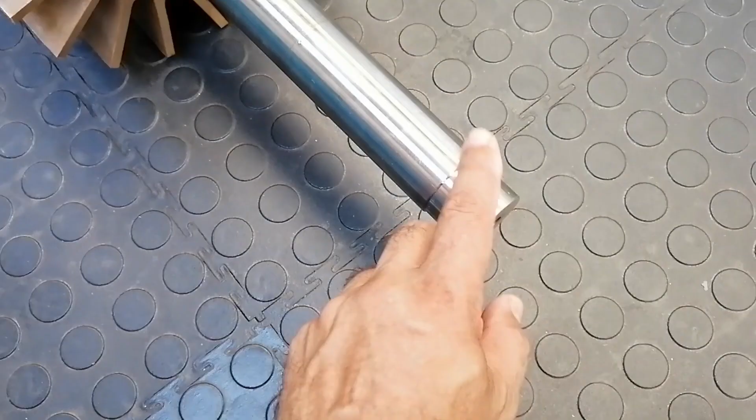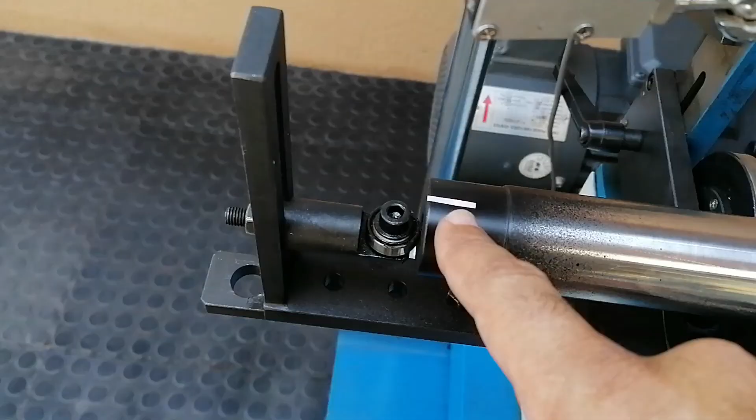Enjoy this video, guys. And I'll spray this area here. Okay, so that's all sprayed up now. You can see the lasers on the reflective tape.

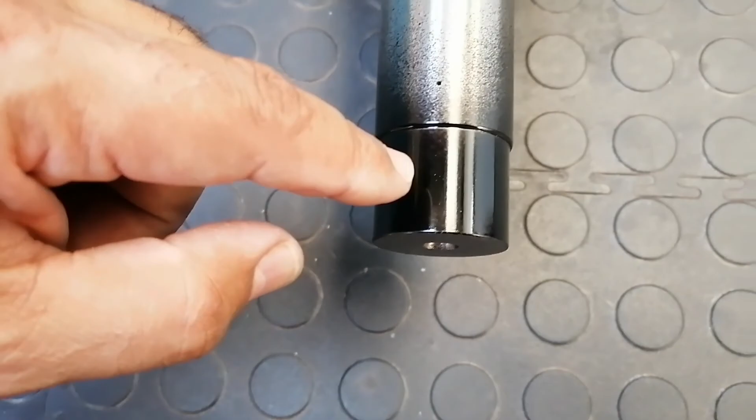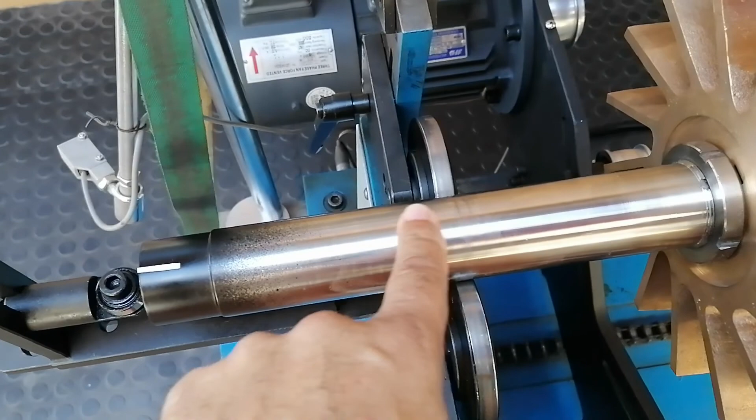So the reason for me spraying that black is because the shaft gives off a reflection. The laser from the speed sensor might get a false reading with that reflection, so I give it a nice black background. So I must just put another piece of sticky tape in front there. But this gets put on every shaft just to eliminate that potential false reading.

You can see the lasers on the reflective tape there. I don't know if you can see the red dot, but anyway, so this is the speed sensor, and that's 0 on the shaft.

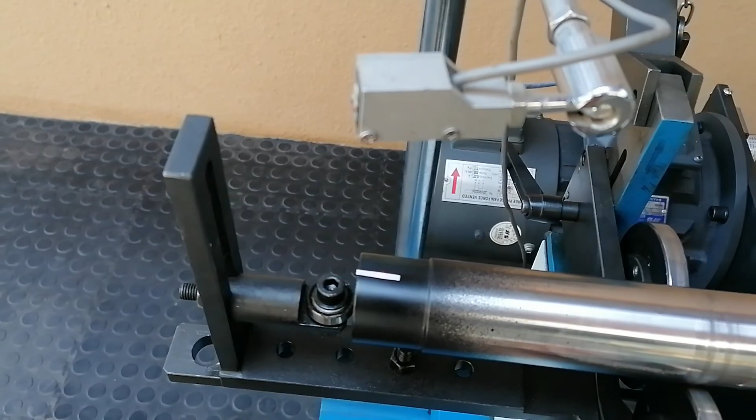In the keyway you put some putty. It's not the exact same density as the steel, but it's quite close, so we put that in there just to take up the steel that's machined out. So yeah, almost ready to go.

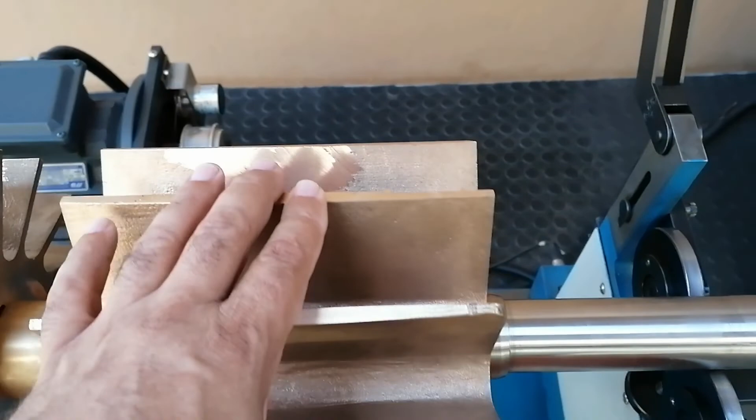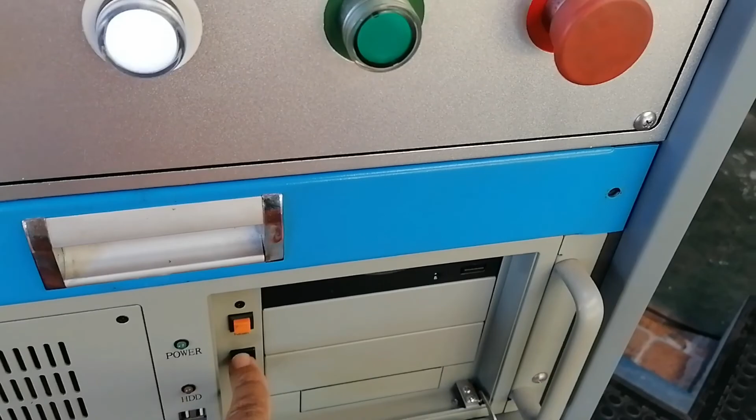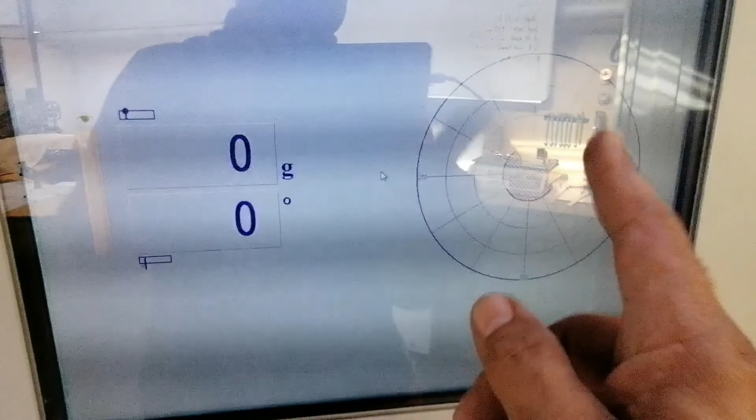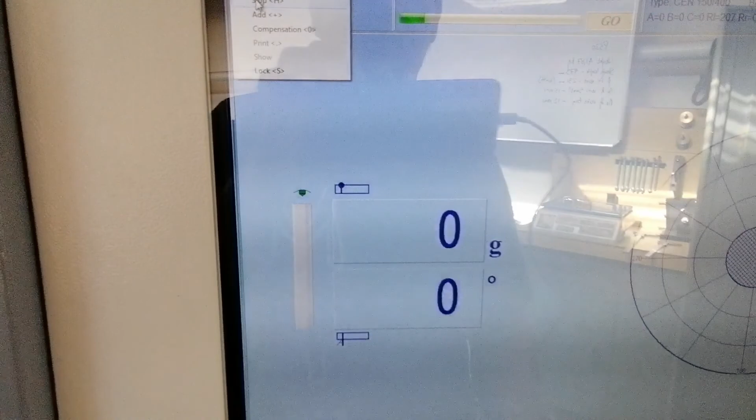Alright, so the computer's on. If you can recall, this was a screen that I balanced the first impeller with, because that's a single plane, because there's only one impeller. So this is the thing that shows like one impeller. So once again you go up there, you stop that, you go to rotor, and you add another line.

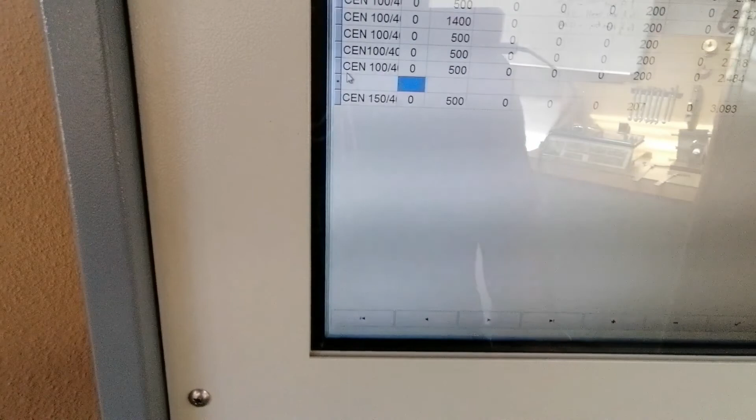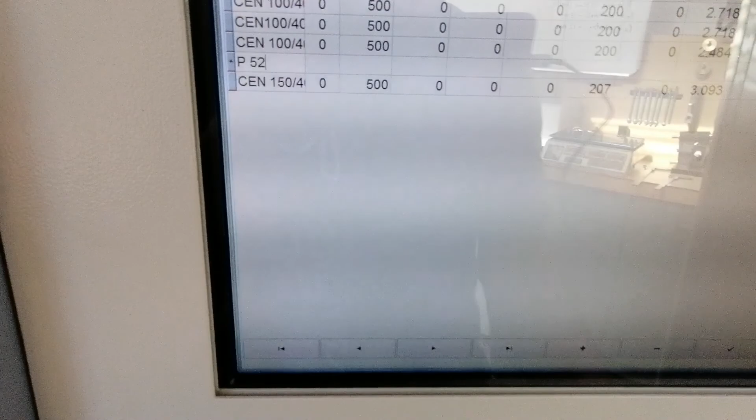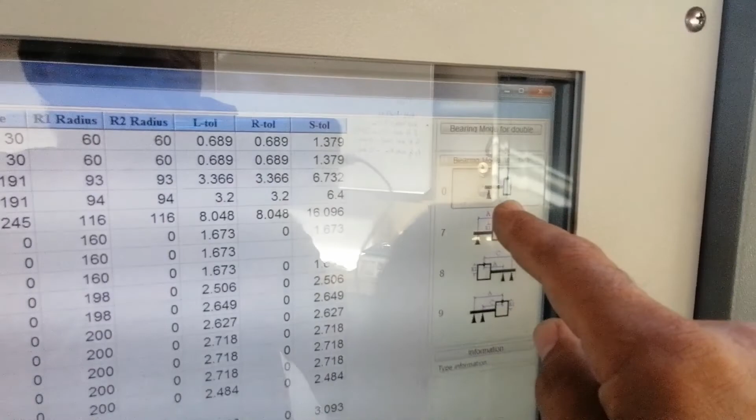So in there you put the type of impeller. In this case it's a P520. When you come to this one here, you see there's a 0. With the previous one that you saw in the other video, there was 0, because that showed 0 there, as you can see, which is a single plane. This is a double plane. Okay, so you change that mode.

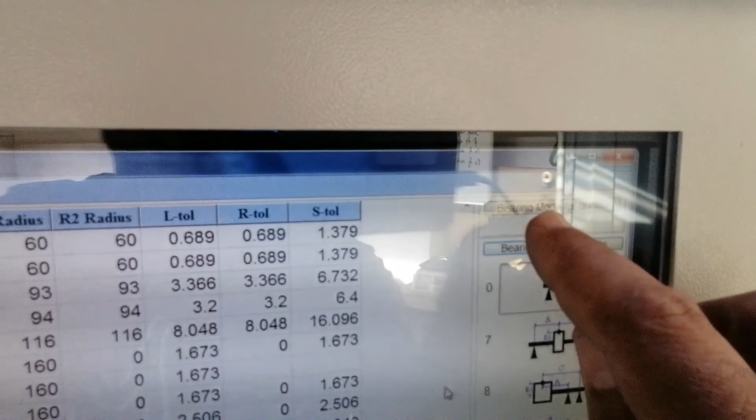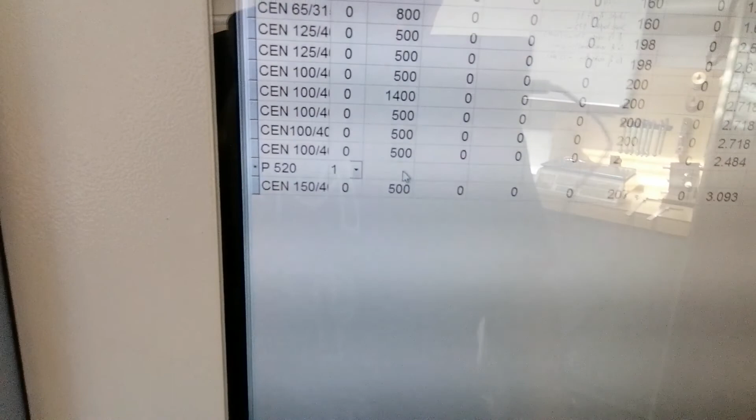I don't know if you can see, there's a bit of a reflection. See, there's single mode there and there's double mode there. So you change that there, and you can see there number 1. That's basically the configuration that we have here. So you go back to this side here and you press 1. So it will choose number 1 over there, and then you start filling in this information.

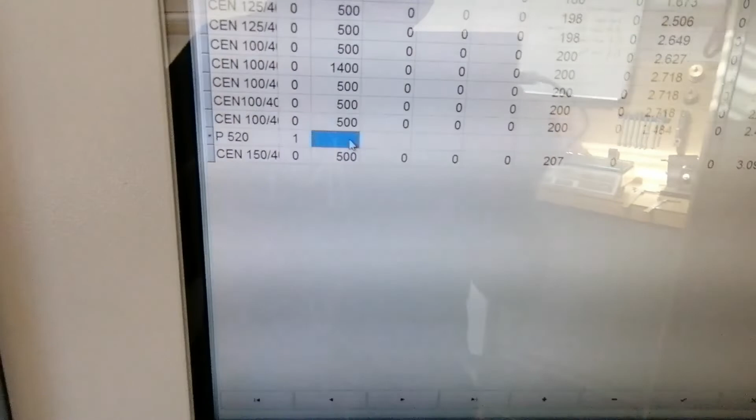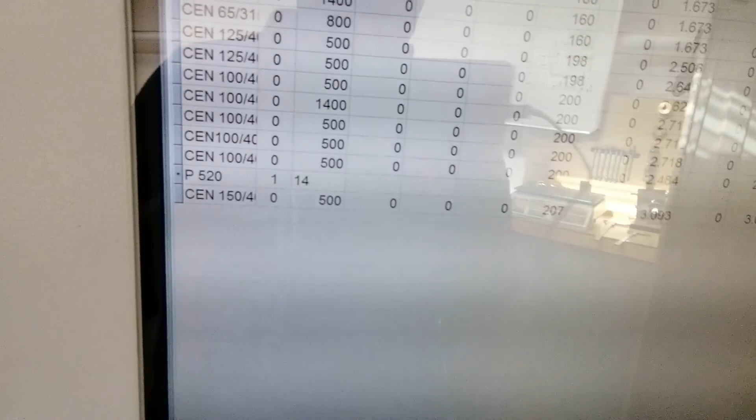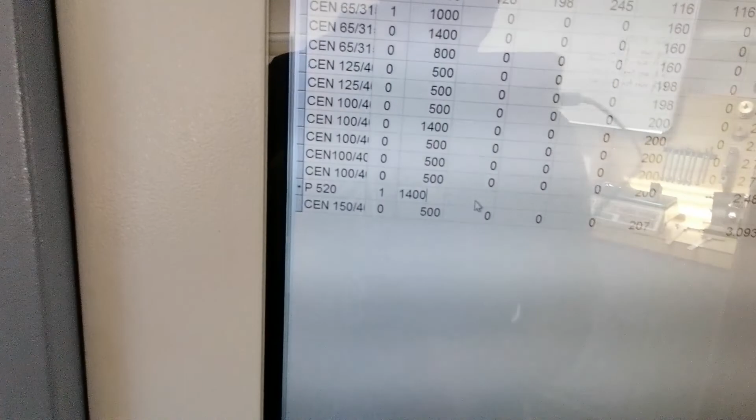Alright, so the first thing you do here is you put in the speed that it operates at in the field. So I'll make it 1400. A size, you see all the others there were zeros because this is all single plane, this is all double plane here. So now you start taking sizes on the equipment over there. I'll put it in time lapse, and I'll take all these measurements. Okay, I'll just do this quickly here.

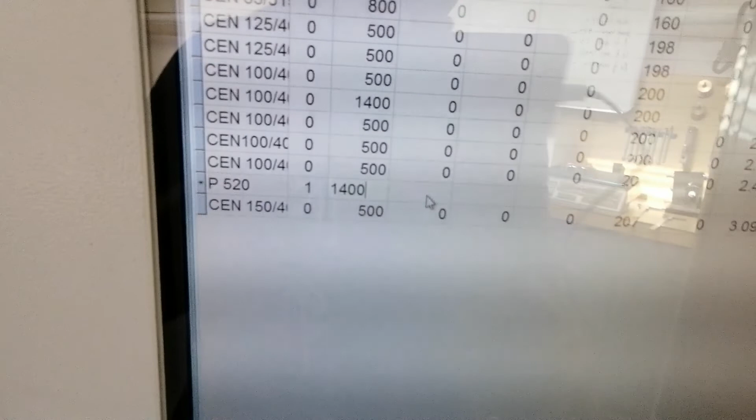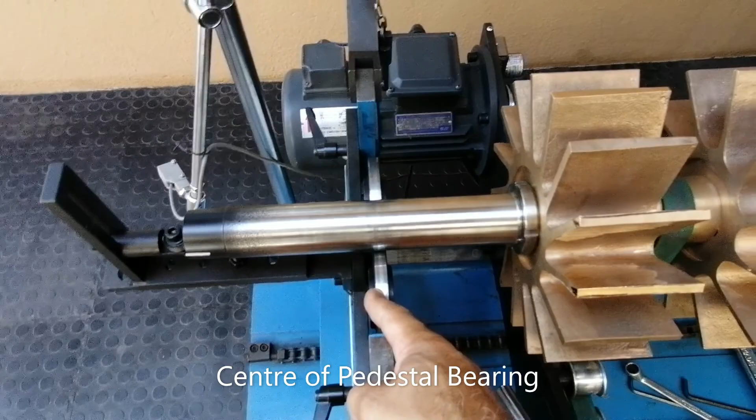Let me show you. Like A measurement will be from the center of this impeller to the bearing on the pedestal. That would be A. C will be from the center of this one to the center of that roller there. And B will be from the center of this one to that one. So you can see here they ask for A, and they ask for B, and they ask for C. And that's just what I showed you there now.

Then R1 would be the height from here down to the shaft. And then you take the diameter of the shaft and you divide that by 2 to get the radius, and you add the radius to this height here. So you can work in the center of the shaft. That will give you the measurement from the center of the shaft to there. That would be A.

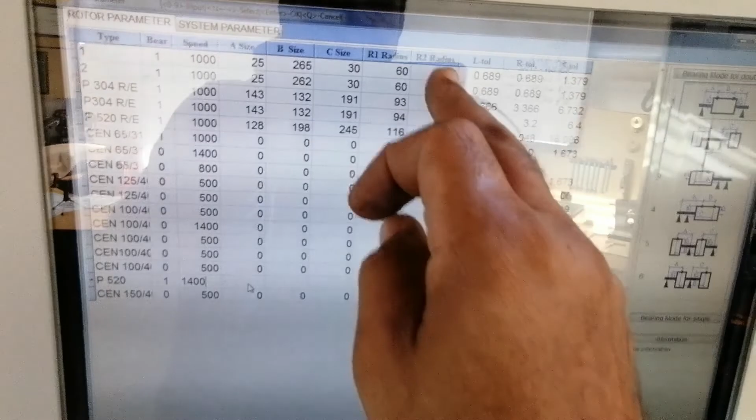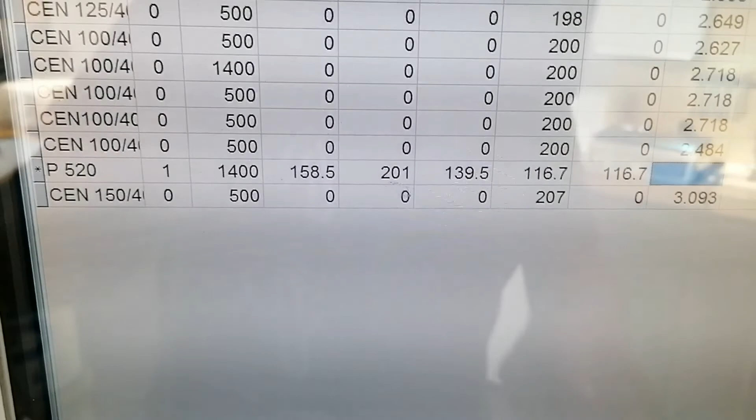That would be radius 1. Radius 2 would be this side here, which would be the same as R1. So let me just capture that data. Okay, so I got all those measurements from the impeller like I explained to you earlier.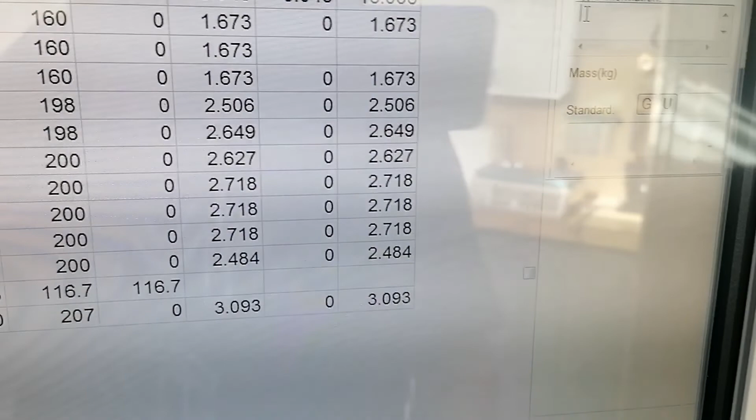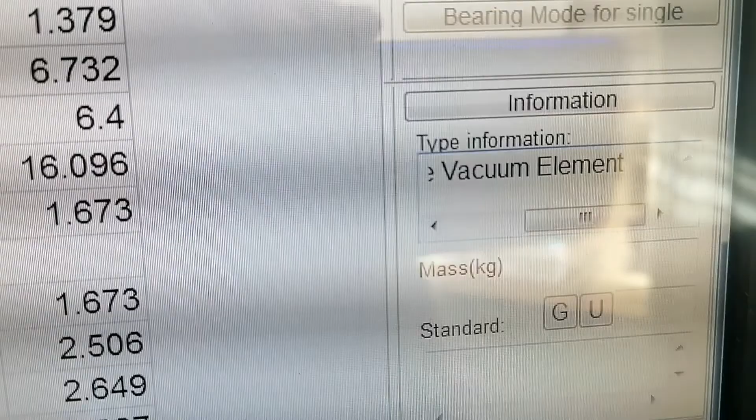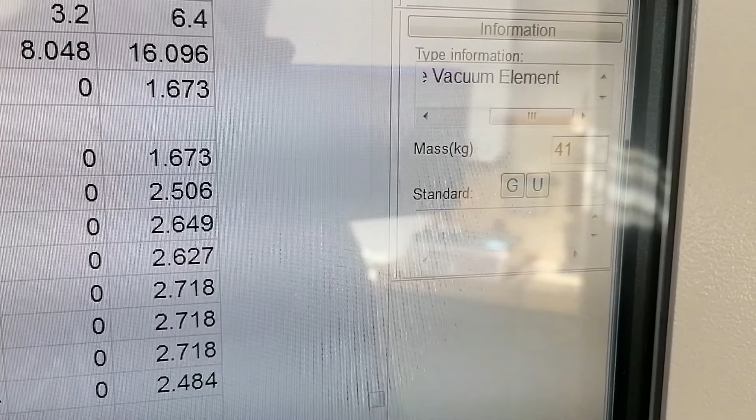Fold it in. Got to this stage, so once again I go here to the information side here. Press that. And then I put in the impeller size, the impeller make, which would be P520, bronze. Right, so I punched in the bronze vacuum element. The mass of this thing was 41.87. 41.87. So you'll get your tolerances here.

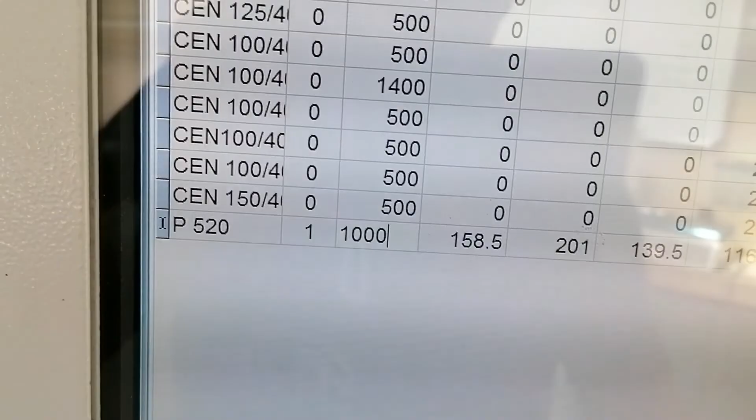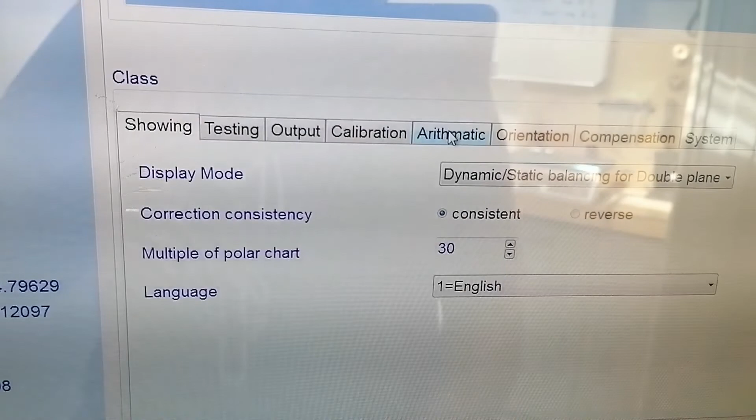Then you change your speed again here to what you're going to balance at. This one I'm going to balance at 1000. And then I'll press OK. Then I'll go to the systems here. I'll change this here to double balance, dynamic double balance. No, static, that one there. And then I'll go to the arithmetic. 8.9, that is the density. That stays the same. All of this stays the same here.

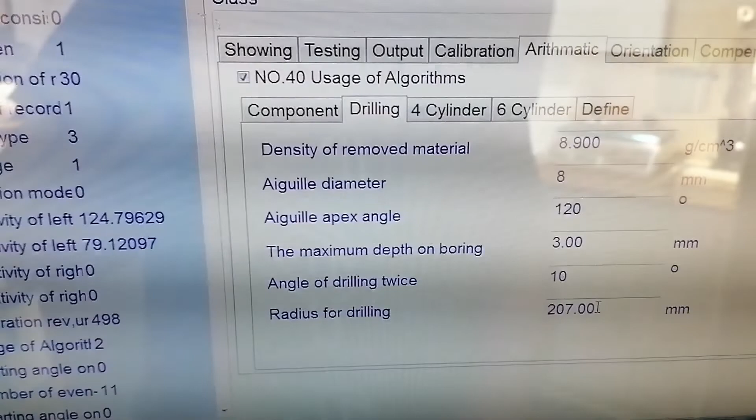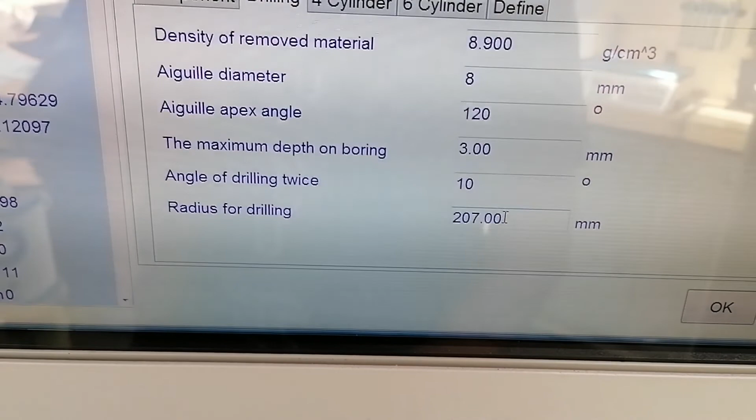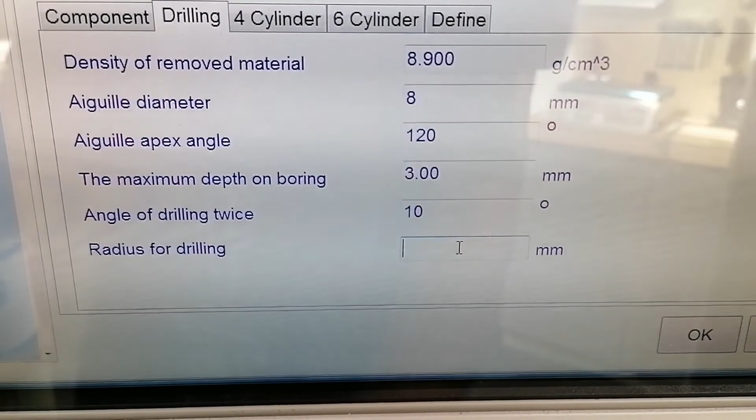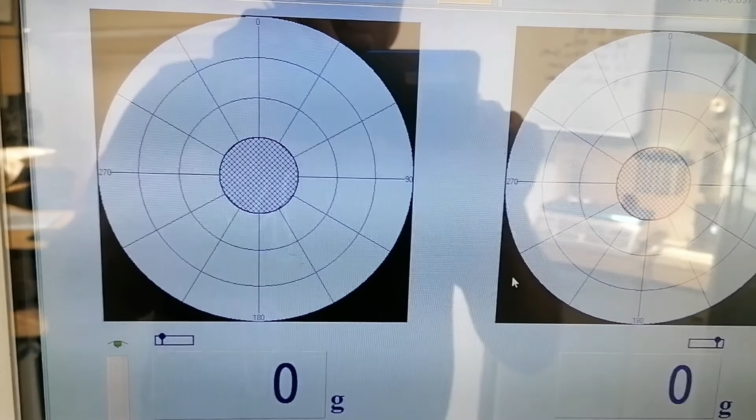This changes here because the radius of this. Let me just check what this radius was. Yeah, so then here you put the radius in. The diameter was 231. So this radius here will be, let me just check, 115.5. And then you OK that. So there you can see you have double screens now, but as soon as I run the machine, this will change. So yeah, let's just start the machine up.

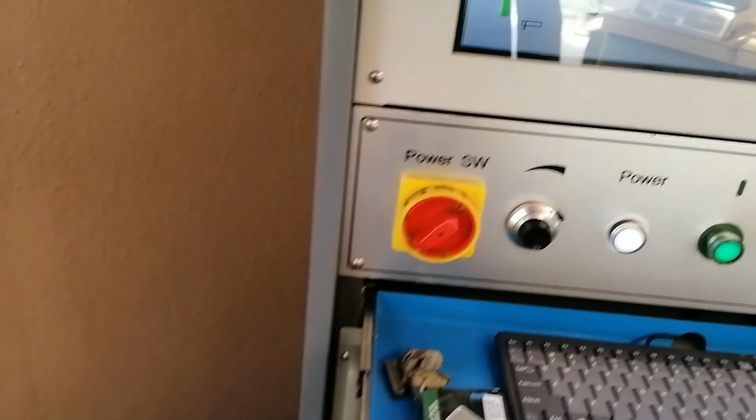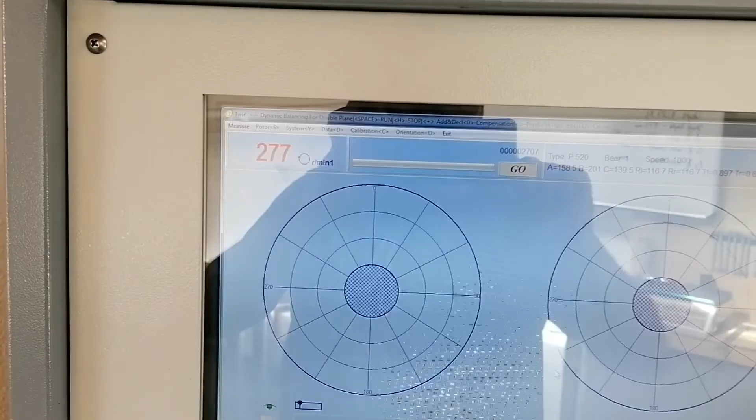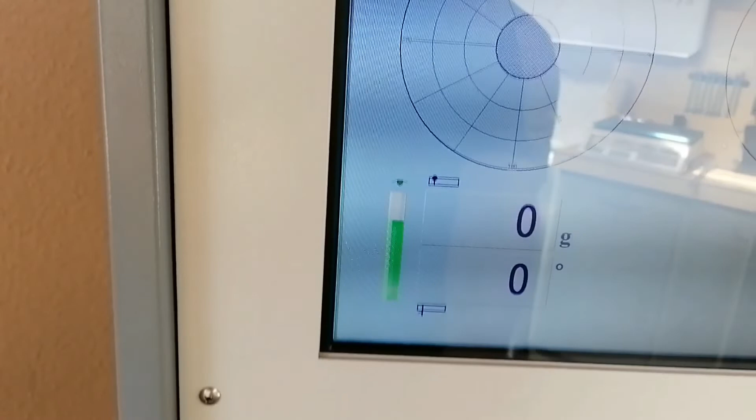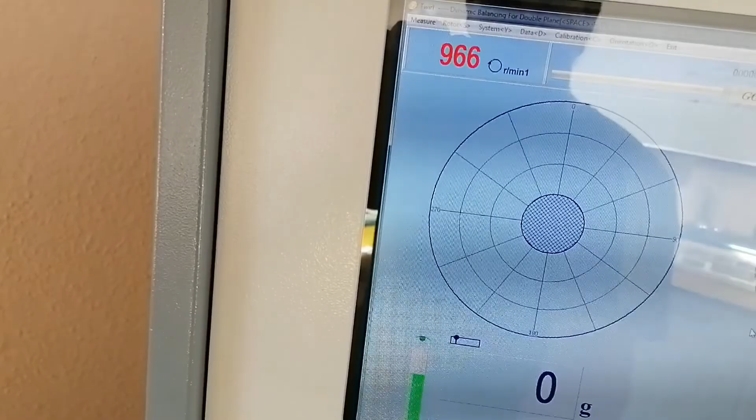So there you can see, guys, the screen changed to that one, and she's busy running now. Obviously it will go up to 1000 here. Okay, she's on 640 now. I'll just turn it here. You see it's climbing up. She's picking up speed over here. Turn it some more. Okay, so she's almost at speed. You can see she's really motoring on the machine. Turn it here some more. She goes.

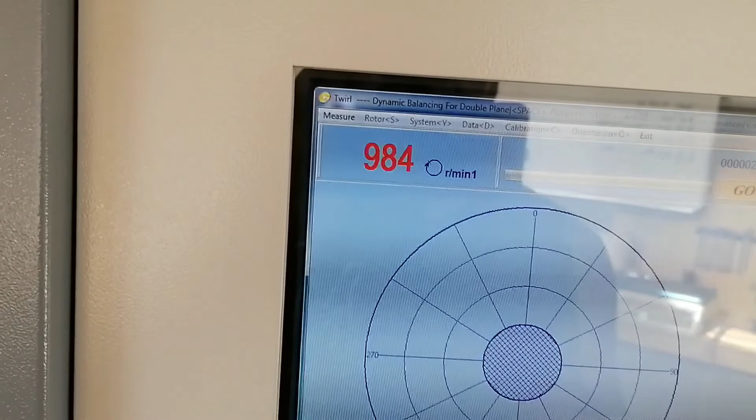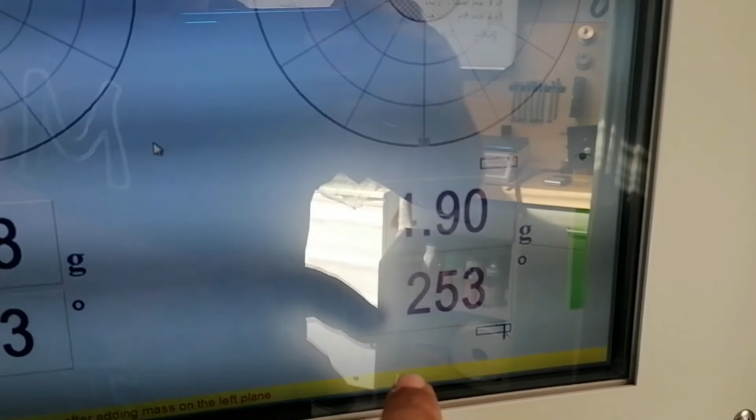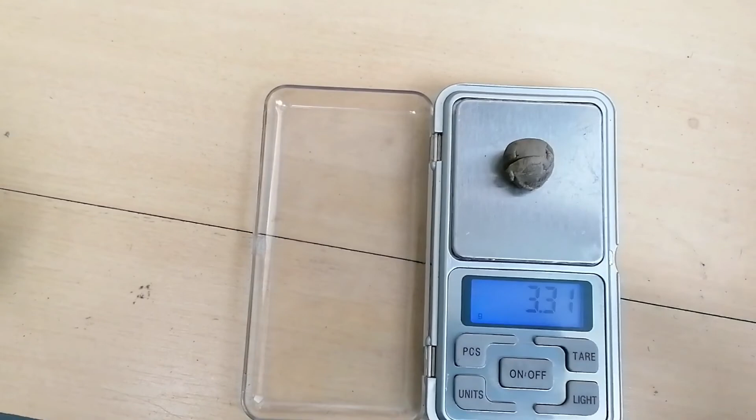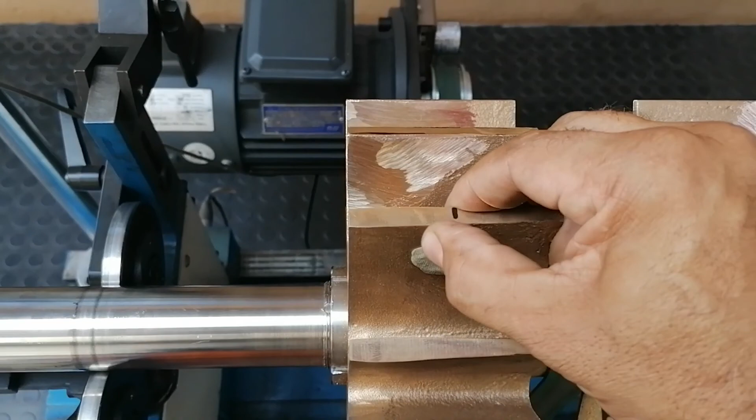Okay, there we go. So once she's up to speed and I stopped it, she says 4.38 at 303, 4.90 at 253. So now I'm going to put on the calibration putty. Okay, so I got my scale, took my piece of calibration putty, put it on there, and that's 3.31. Let me just write that on the board. And that I put on at 0. So I'll come here. She's at 0 there. Put the putty on. Make sure it's nice and firm, otherwise it will just fling off when you work the machine.

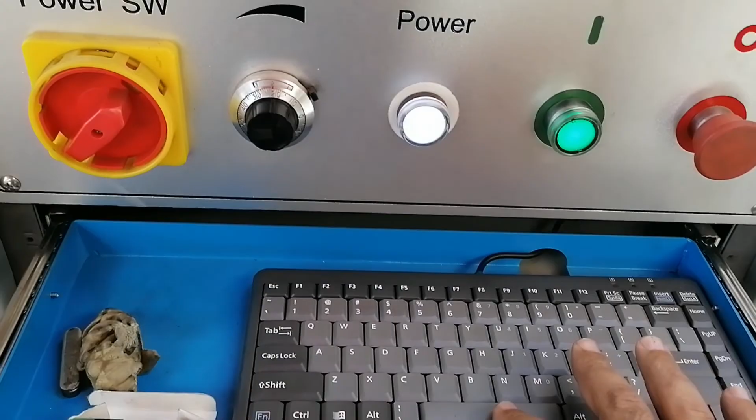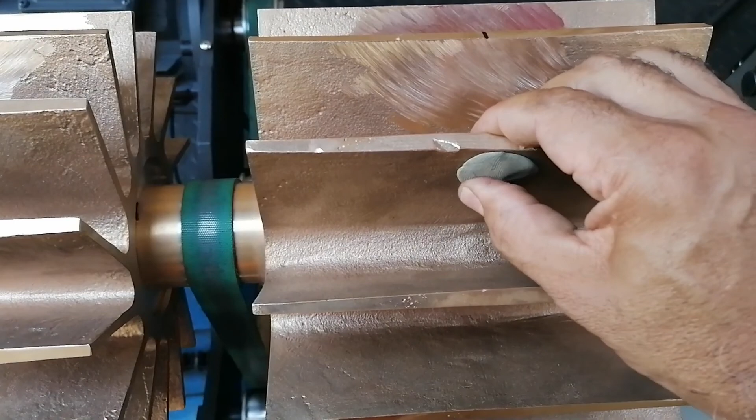So now start it again. Should go up to 1,000 again. Okay, so once it's full green, I'll press H here and I'll stop it. And then the moment she stops, I'll take the putty off this side and I'll put it this side. Let me just assist with the stopping here. Okay, so I'll take this putty off here. I'll turn it to 0. And I'll put it here on this one, because that's at 0 there. I'll make it nice and firm in the center of this unit.

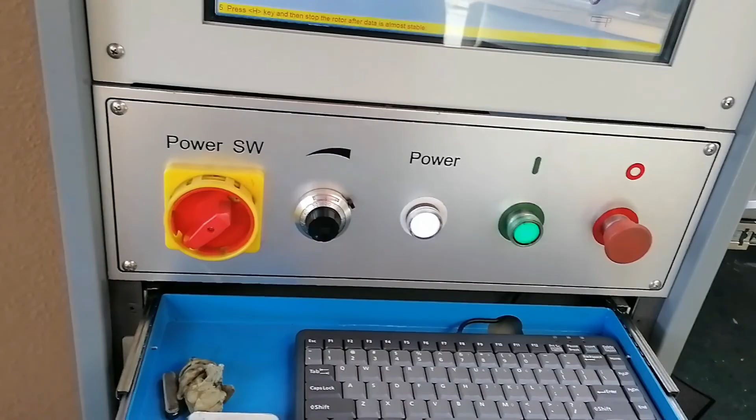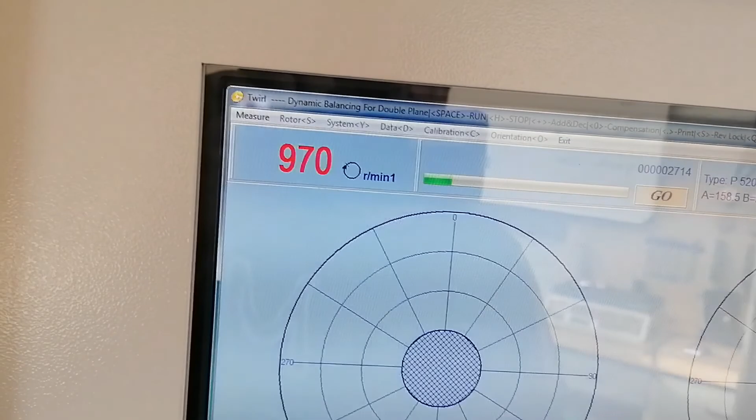Okay, I'll start it again, and away she goes. So once she reaches there, I'll press H again, I'll stop.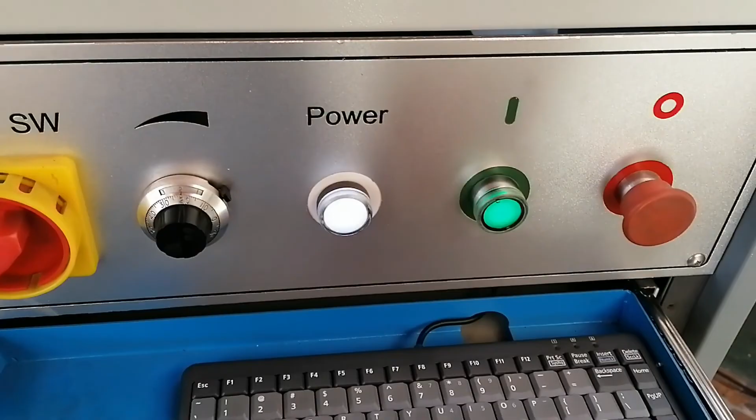Okay guys, so this is where I'm ending it. Thanks for watching it right to the end. I must remind you that the procedures that I'm showing you are with this model of balance machine. It will definitely vary from machine to machine. Different manufacturers will have different processes. So what I'm showing you now is the processes on my machine, as I have stated in previous videos.